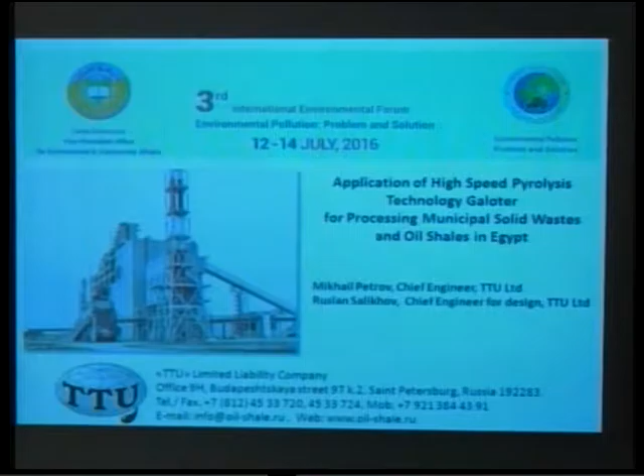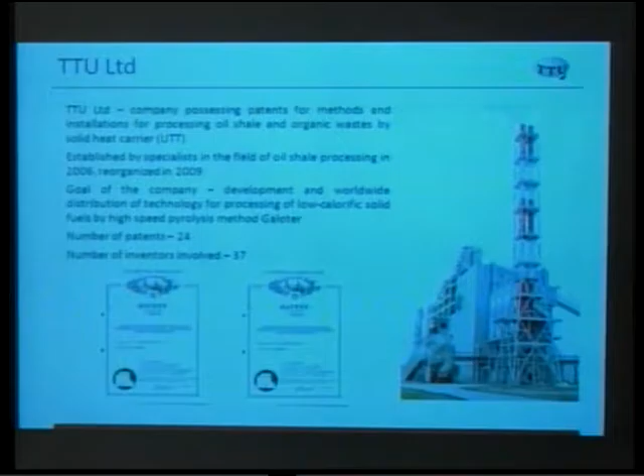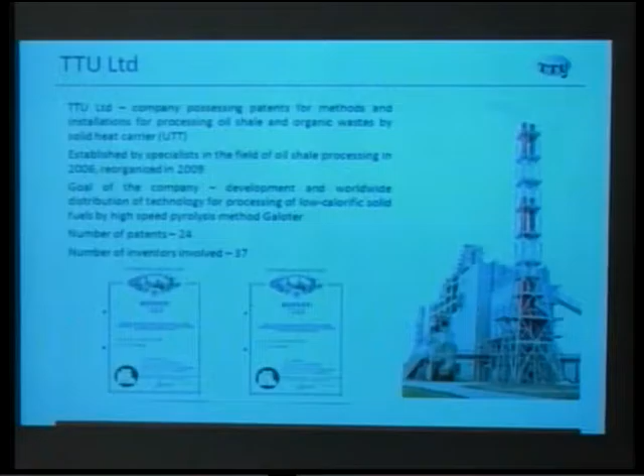I'm representing the company that developed a technology that could help to remove wastes, transfer waste to useful products, clean the cities, and use low-grade fuels in an environmentally friendly way. Our company has 24 patents and 37 inventors involved, and we have been working in this field for more than 40 years.

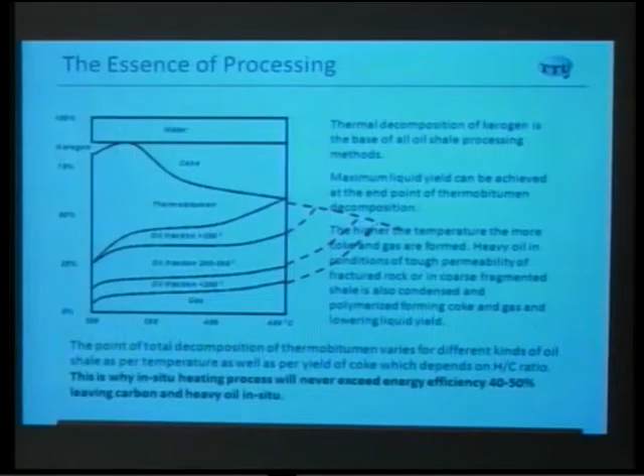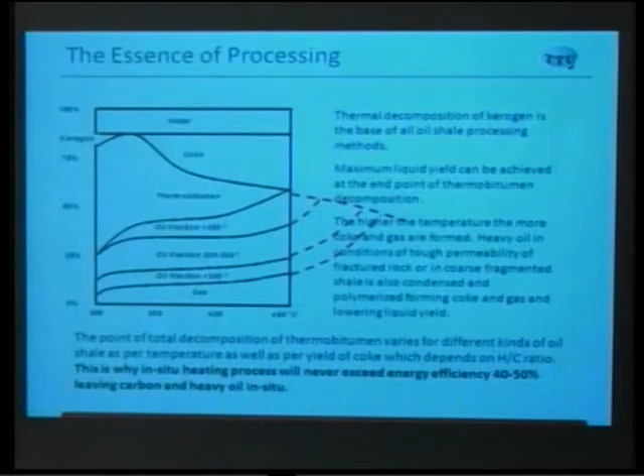The essence of the technology is that high-speed pyrolysis in the reactor happens in 5 seconds of heat, and the fuel is heated by its own ash. At some points, we can, in the same reactor, receive oil, or we can raise the temperature and produce gas. All this could be obtained in one reactor, and this technology is not very complex.

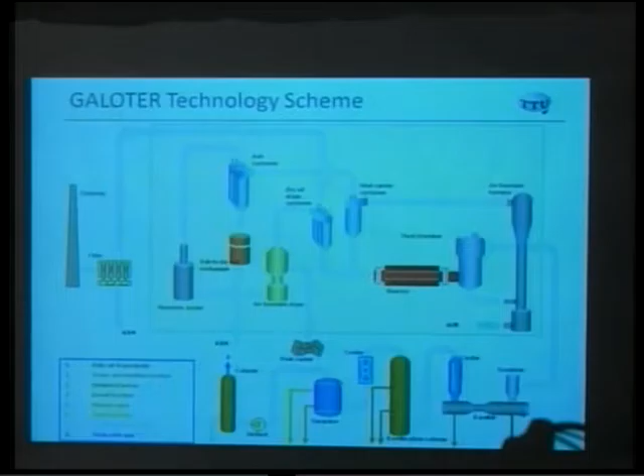Fuel is dried, then heated up by its own ash, and decomposed organic matter goes in the form of vapors to the cooling system, where it transforms into liquid fractions of fuel, diesel, benzene, and gas. The coke goes to the air fountain furnace, where it is gasified, and then fuel gas goes to heat recovery boilers, where steam is generated to produce electricity, and ash is used to heat up a new portion of fuel, waste, or other organic matter.

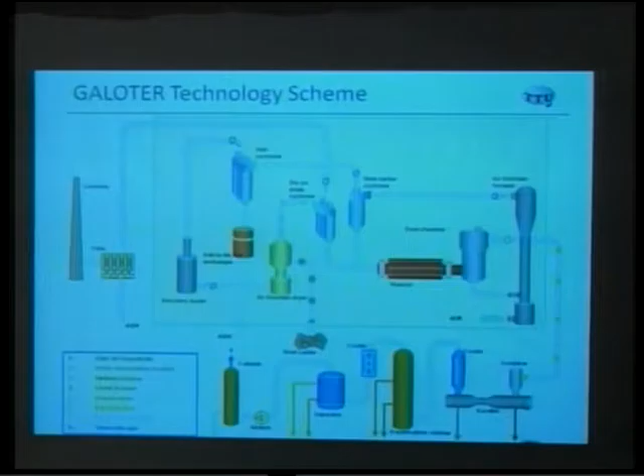Here is how it works. No dioxin is formed during the process, because there is no chlorine and no oxygen in the reactor. When combustion happens in the air fountain furnace, there are no aromatics and no chlorine, only carbon. It is the most efficient technology in the world.

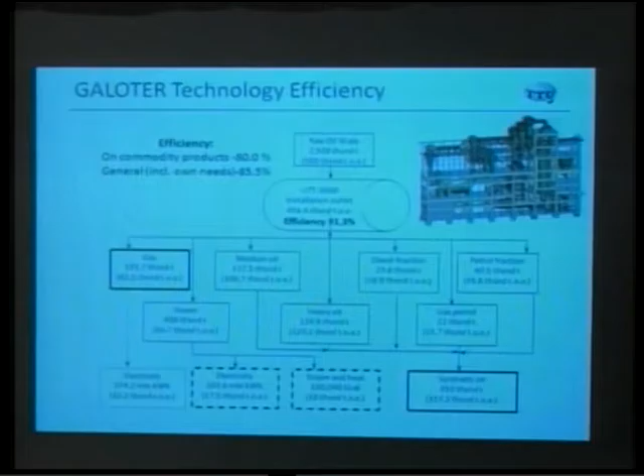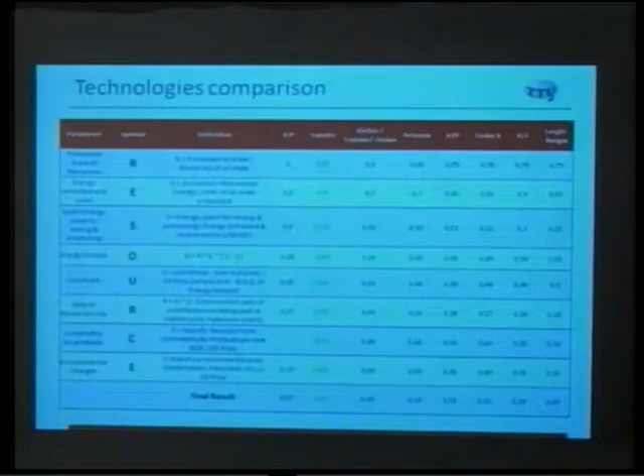Efficiency of this technology is more than 90% when counting useful products. Compared with other technologies in the world, such as fracking, in situ, and others, our technology brings the biggest final result, expressed in profit or minus environmental costs.

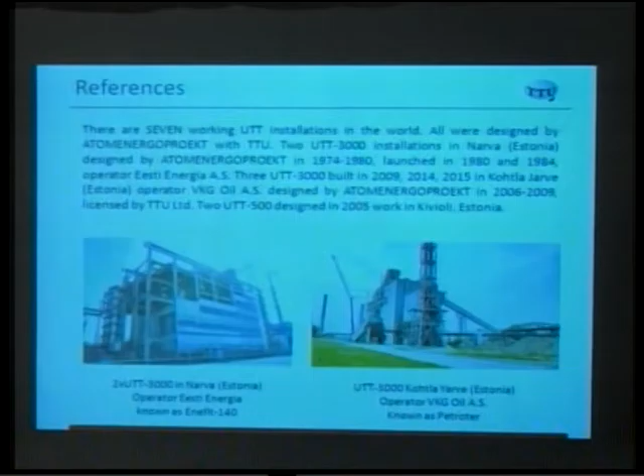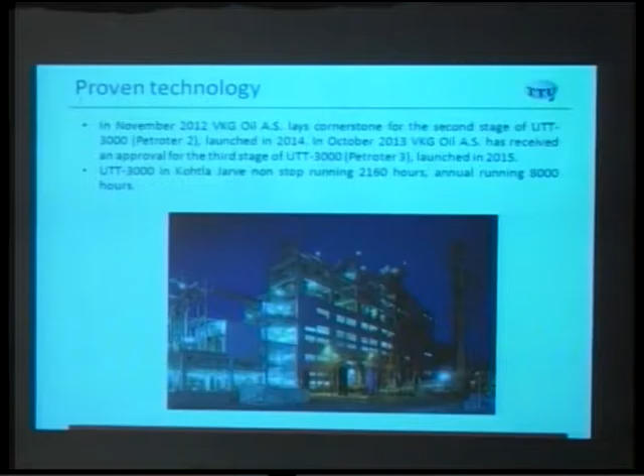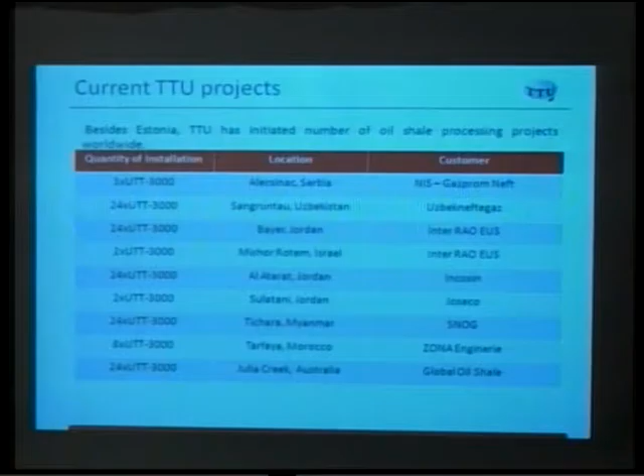These are references, photos showing how the plants look in Estonia. In Estonia, 5 installations now work with a capacity of 1 million tons per year, and 2 installations work with a capacity of 150,000 tons a year. This shows a number of projects we are involved in across different countries of the world.

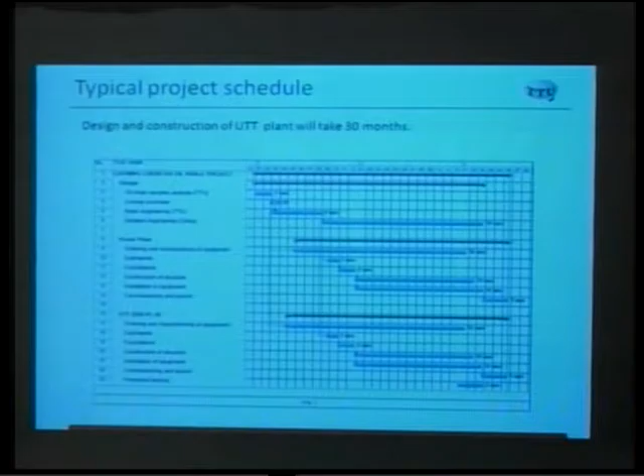This is a typical project schedule. All the design and construction takes only 2.5 years for any capacity plant. Before that, we also provide geological research.

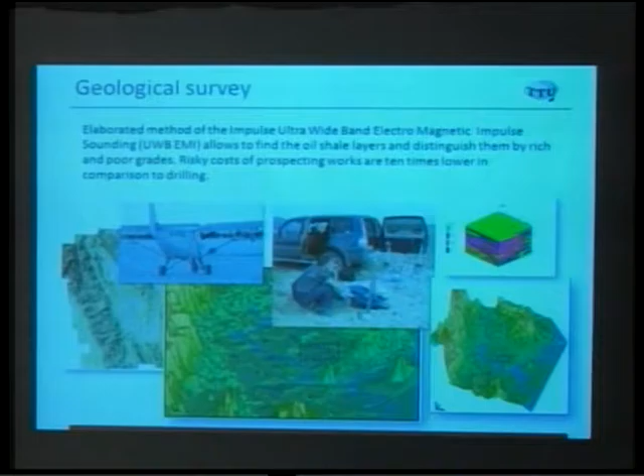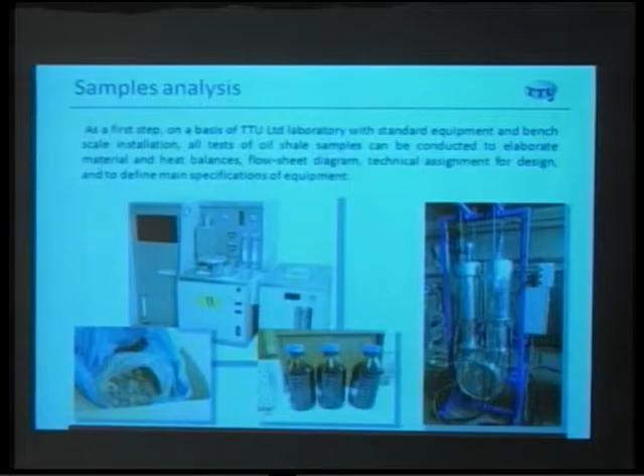We do exploration by remote methods, by electromagnetic sounding, and we can do it from an airplane or from a car. As a result, we receive a 3D map of the deposit of oil shale or solid waste. We also take samples and test them in our laboratory bench-scale installation, which allows us to design a plant of any capacity.

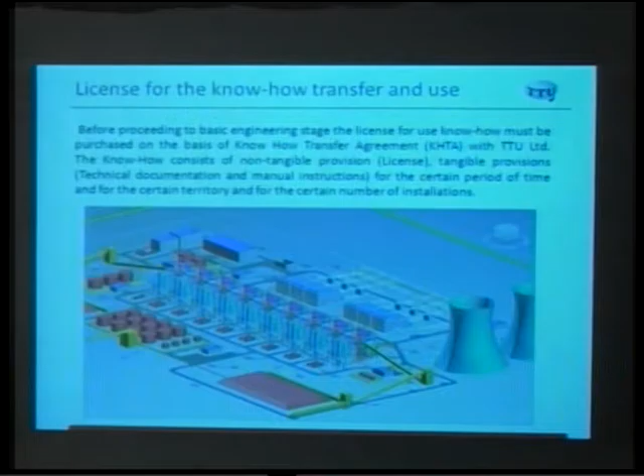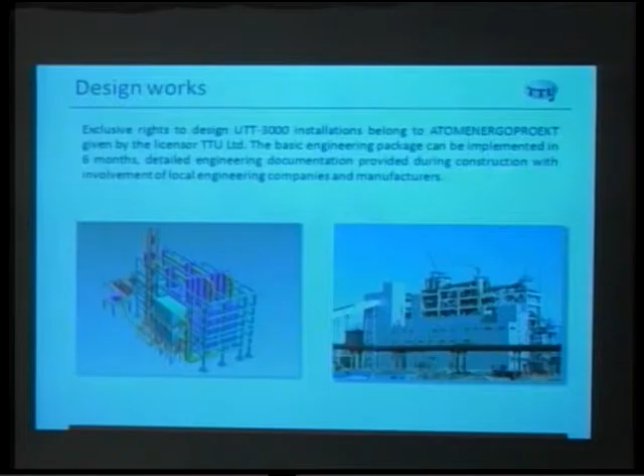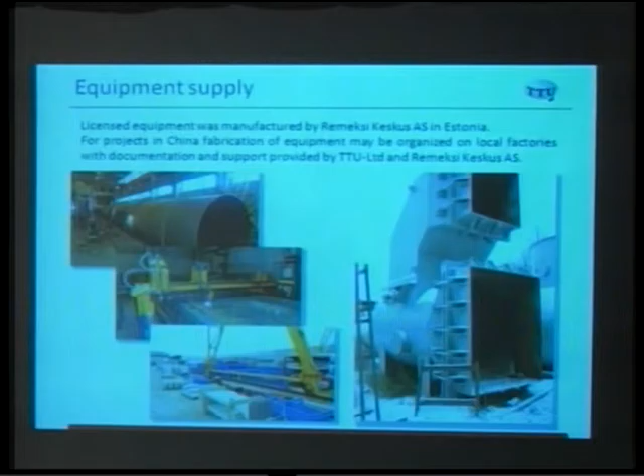For example, this is for a Jordan oil shale processing plant. On the right photo, you can see a processing plant of 1 million tons a year for oil shale in Estonia. All the equipment is produced by our partners, Remeksi Keskus in Estonia; it is very big equipment, and it is licensed and guaranteed for 30 years of operation.

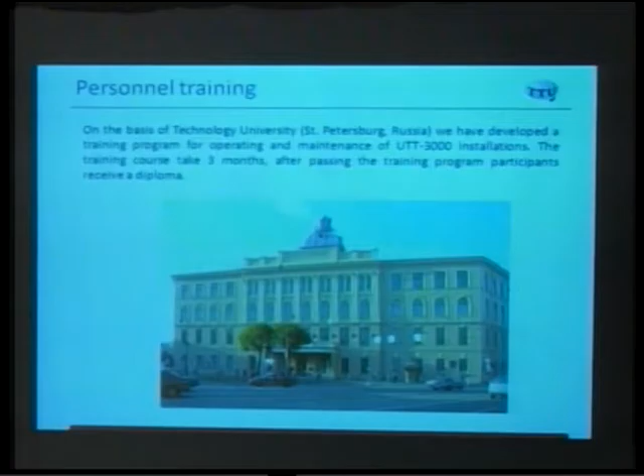On the basis of St. Petersburg Technology University, we have organized courses and a training program for preparing personnel to serve this plant.

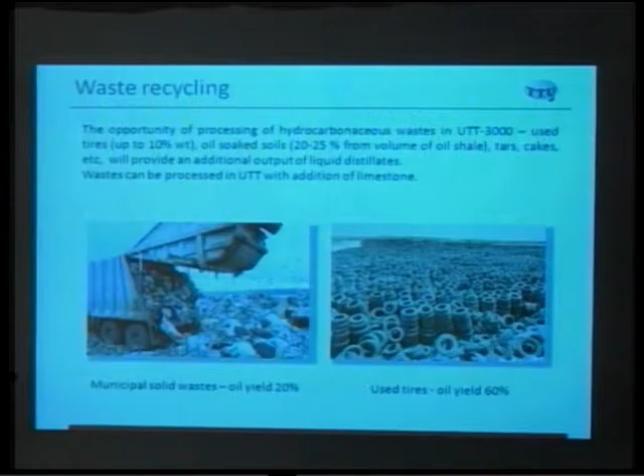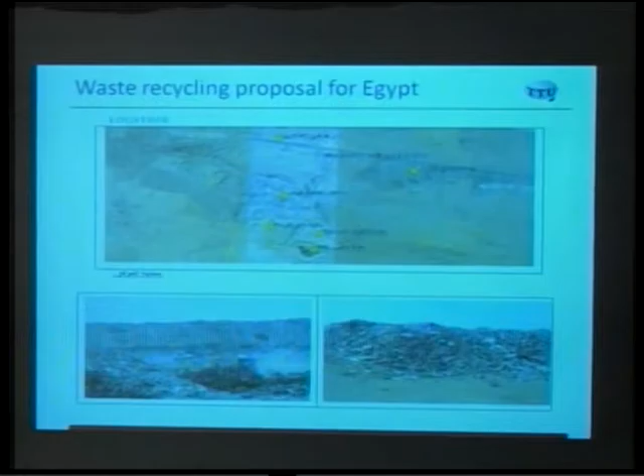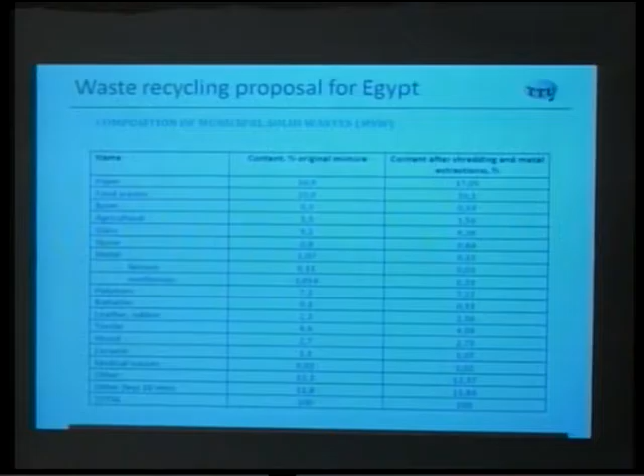Our technology also allows processing of municipal solid waste and turning it into useful products. We have presented a proposal for Egypt to build a plant at the landfill near Alexandria. We measured the average content of the waste at this landfill—how much metal, stone, glass, food, and other ingredients—and designed the layout for this processing plant.

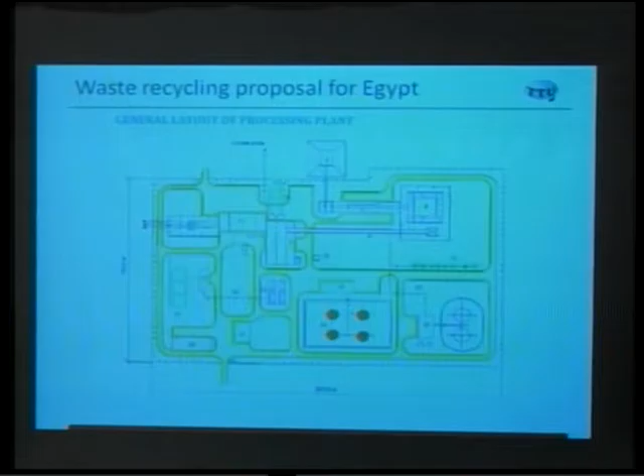It is not very big, only 200 to 250 meters. This is a list of the facilities we need to build, and production activity will include producing 2,000 barrels per day of oil and 600 megawatt-hours a day of electricity, as well as asphalt mixture from the ash.

As well as serving for disposal of the waste, we have calculated all the cash flow analysis. In the project, you can see it pays back in only 3 years of operation.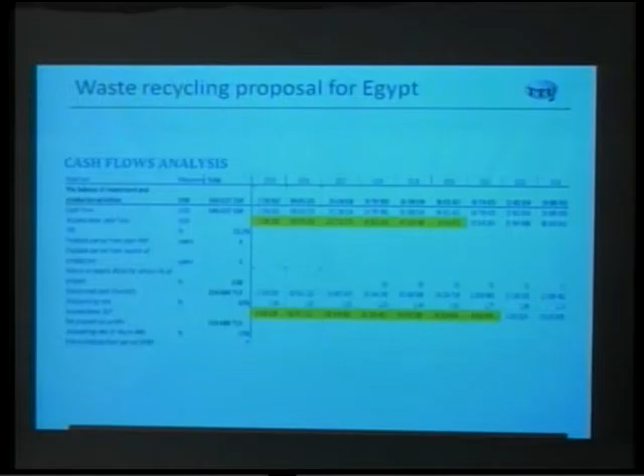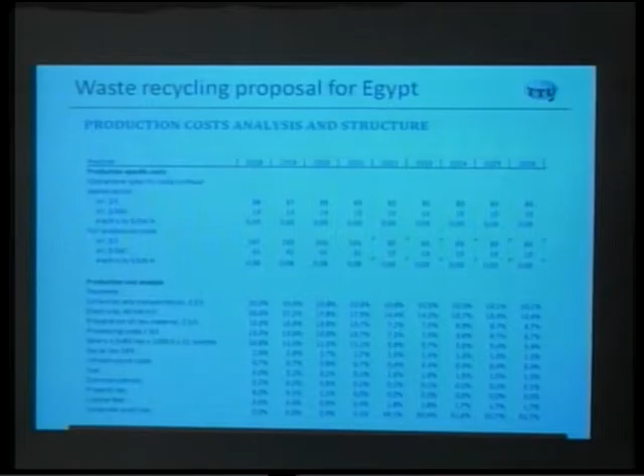Production cost of oil will be only $13 per barrel without amortization, and $40 with amortization—very cheap. Electricity costs 3 cents per kilowatt hour.

So the advantage of this technology is that we have an honor to offer to Egypt for implementation. It is complete utilization of municipal solid waste, with no remaining material on the landfill. All the material goes to useful products. Landfill will be released, and you can use these lands for any other purpose. No outside energy is required to utilize the waste.

No hazardous emissions are generated. Dioxin is not formed in the absence of oxygen in the reactor and the absence of chlorine and aromatics in the combustor, so no dioxin is formed, and sulfur bonds are bound to the asphalt mixture, to the ash, and to cement.

We can also produce drinking water. Instead of using a cooler in the power plant, we put a desalination plant, and then we produce drinking water. The Kyoto mechanism may be used, because our vessels are designed in such a way that they do not consume the Kyoto quota for greenhouse gas emissions.

The high efficiency of this project can encourage development of the waste collection system in Egypt, to make all your cities cleaner, people healthier, and to make life better.

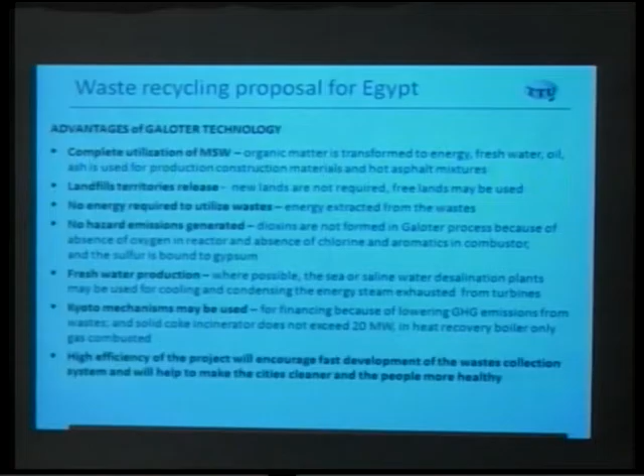Another proposal we gave is to process oil shale in the Red Sea area. In 2009-2010 we assessed oil shale deposits in the Red Sea area and made a proposal to build an oil shale processing factory using our technology in Quseir.

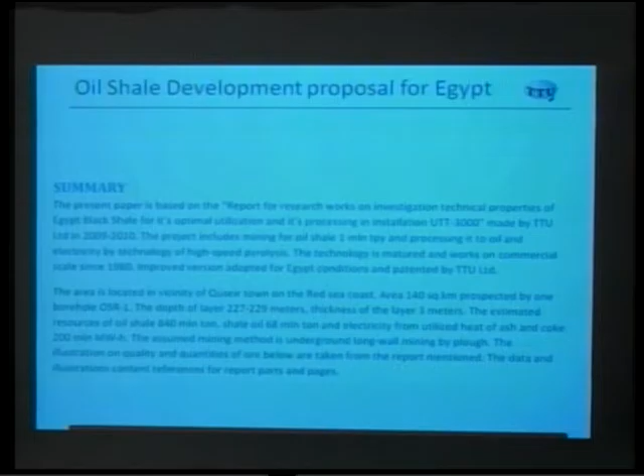We have assessed 6 different deposits of oil shale. We have calculated resources, and we assessed that the production cost of oil in this Quseir deposit will be $19.

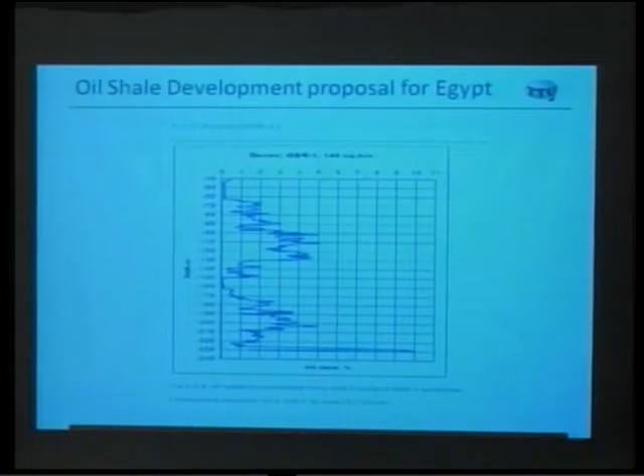This is the yield of oil from 40 to 230 meters depth—yield of oil from oil shale up to 10%, as you can see at depths of 230 meters. It will be mined by the underground method, so it will not harm the environment during mining.

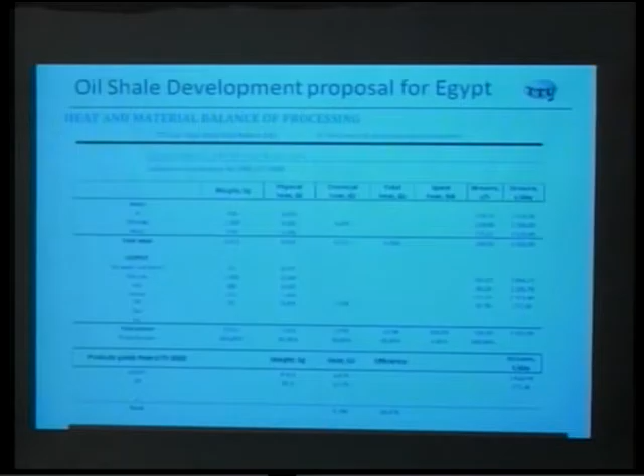We calculated all the organic elements in the oil shale—how much gas, how much electricity. We built the technology with material and heat balances, demonstrating how much ash, how much electricity will be produced, and the efficiency of energy extraction from oil shale—88% using our technology.

And the payback period is only 3 years.

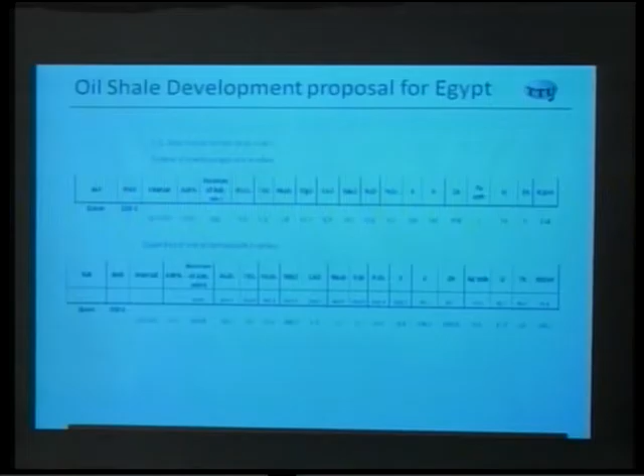We assessed this deposit's reserves of shale, oil reserves, electricity reserves, and the net value of the resources—how much oil, how much ash, how much construction material. We also assessed how much metal is contained in the ash—vanadium, uranium, and other things that could be used.

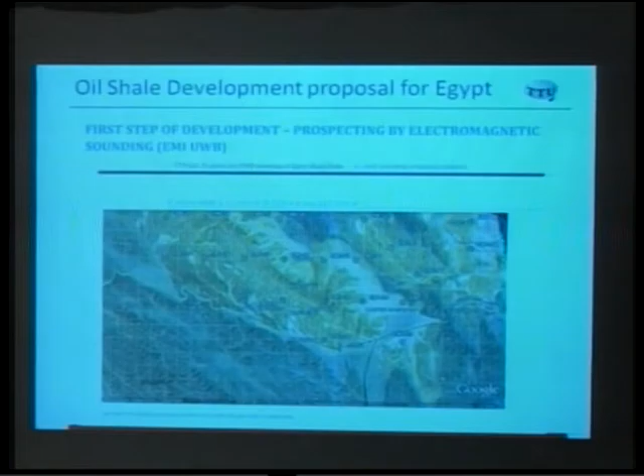We offer to make prospecting works using electromagnetic sounding. These are the points for the electromagnetic sounding, and this is how we do it.

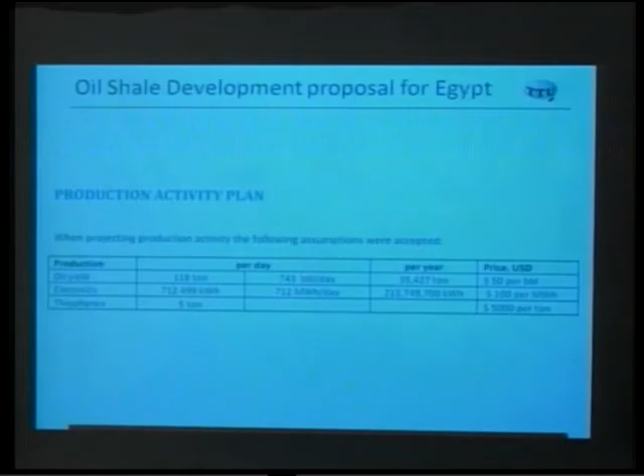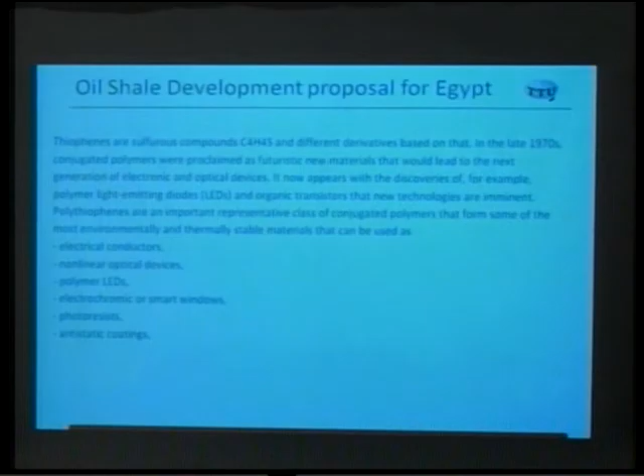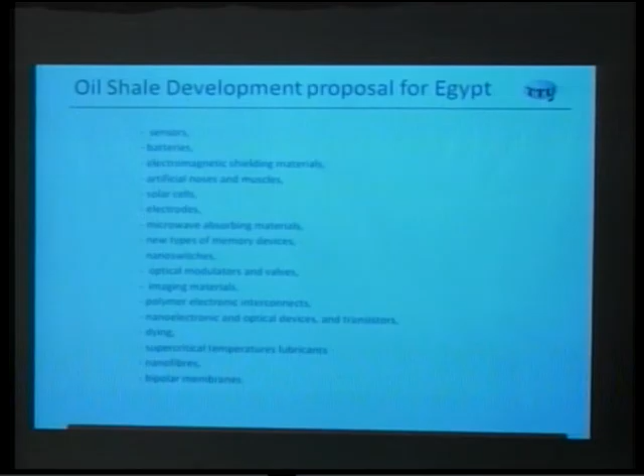So instead of using oil shale as a fuel and having a high sulfur content, we offer not to use it as fuel, but to extract thiophene from this oil and produce electrical conductors, nonlinear optical devices, polymer devices, displays, electrochromic windows, photoresists, anti-static coating, sensors, batteries, electromagnetic shielding—a very long list of products that could be produced from the shale oil and from sulfur in shale oil, instead of combusting it and emitting carbon dioxide to the atmosphere.

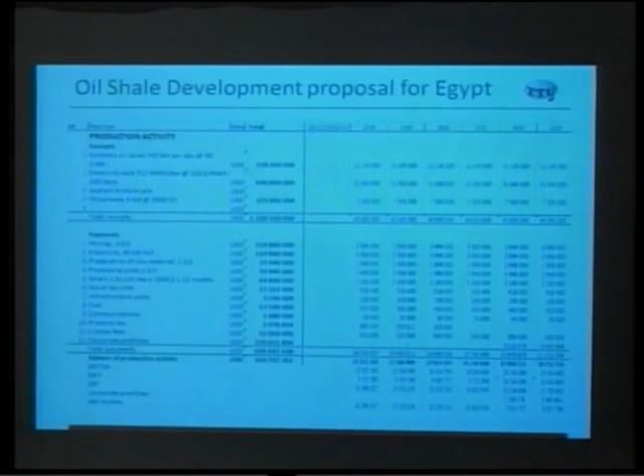And all this—nanofibers, bipolar membranes—could be used as fine chemicals and to lower emissions. So for the production activity overall, the payback period is 9 years from the start and 6 years in operation.